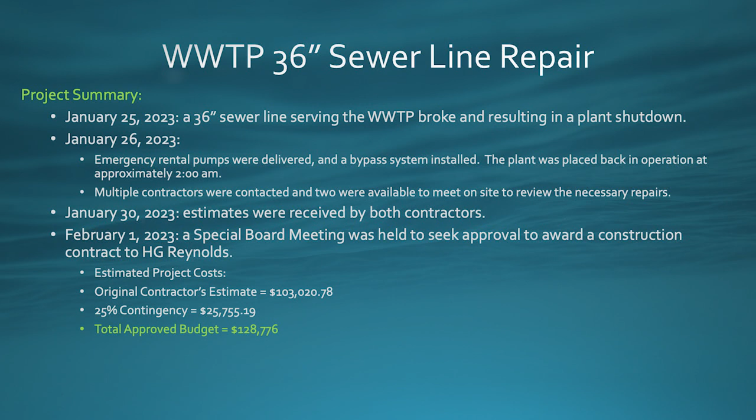So project summary, I'm not gonna run through all of these, but these are the dates of when the break occurred, when we first came to the board and had funding approved. The budget originally approved was $128,776, and then we amended that tonight. We'll go to the next slide, please. We've almost spent that 25% contingency.

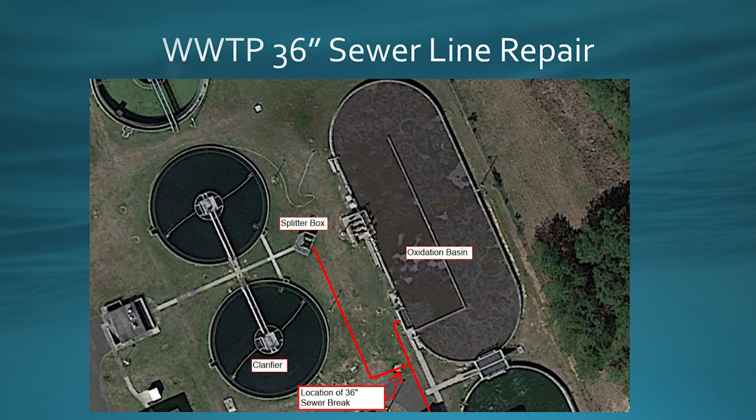Yeah, we did. So this is a picture I shared at the last meeting. This just shows the location of the break between the oxidation basin and the splitter box. And you can see that arrow pointing at the bottom. That concrete you see there was the wall of the manhole that housed the pipe where the break occurred. We'll go to the next slide.

So I've got listed here the same conflicts that I went over before during the legislative memo presentation. I won't really touch on those again, but I will show you some pictures coming up. Schedule: we anticipate March 17th, Friday this week, the 36-inch pipe will be installed and operational.

Same day, March 17th, the bypass pump system will be able to go offline after many weeks of running the plant. And then we anticipate by the next Friday, March 24th, the project will be complete. That will include all backfill, cleanup, and contractor demobilization. So now we'll run through some pictures from the site.

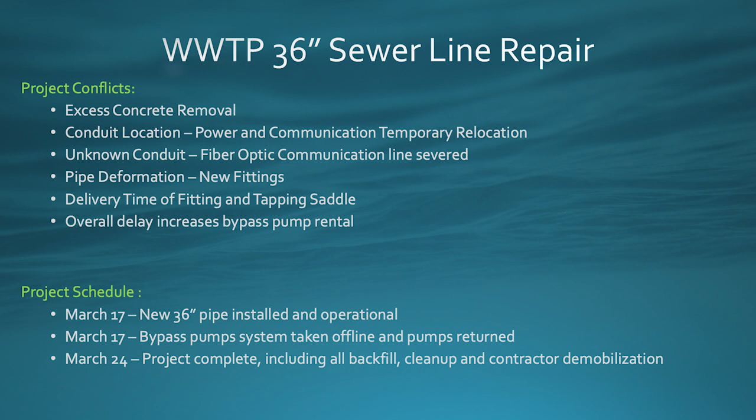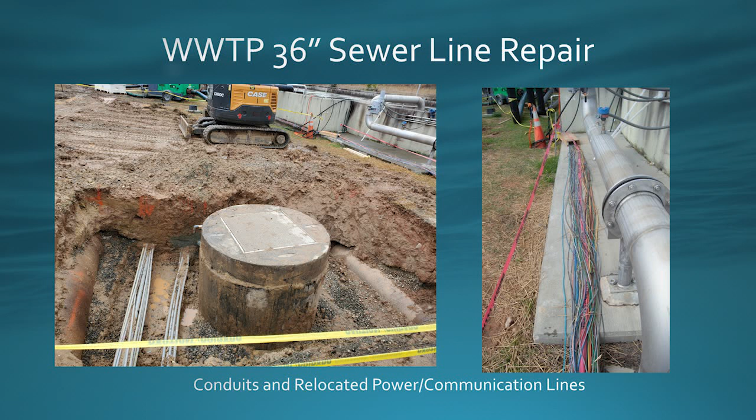So that system, those pumps have been running for about a month now. Next slide, please. So this picture shows one of the conflicts that I mentioned. Picture on the left, you can see a whole pile of conduits. Those are the 11 conduits that we found that were housing the power and communication lines. And on the right, you can see all of the different colored lines that were pulled from those conduits and moved out of the way temporarily so we could do construction.

So part of what was approved tonight was the contractor, the electrical contractor, coming back, reinstalling conduits that you see there on the left, and then taking the temporarily relocated lines and pulling them back through all of those conduits.

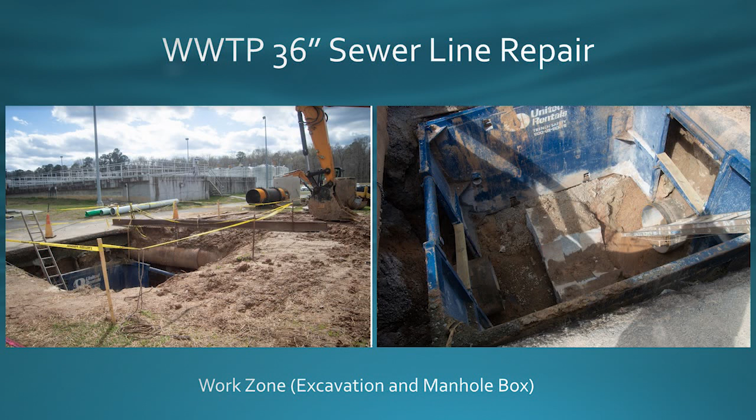Next slide. So this is a picture of the work zone. On the left, you can see at ground level the size of the excavation that was required here. The picture on the right shows, I believe it's about a 10 to 12 foot deep hole that had to be excavated. We've got a manhole box there shoring the sides to keep the ground from caving in. Obviously, that's a safety concern. We have to install that. Down in the bottom of that, you can see a small piece of the concrete cradle that was housing the pipe. We'll go to the next slide.

So these are some pictures of some of the concrete removal. On the left, you can just see some of the upper portions of the manhole. So this is a 12-foot deep manhole. That top section was about 4 feet. And then you can see there's concrete up around that already. So that shallow in the ground, we thought concrete was going to be 10 feet deep. We hit concrete 4 feet deep.

So then on the far right, you can see what looks like rocks. That's a lot of the concrete that we were jackhammering to get out of the hole. And then another picture in the middle showing some of the concrete cradle that still remained after we chipped most of the rest out. So just trying to give you an idea of just how much concrete had to come out of that hole.

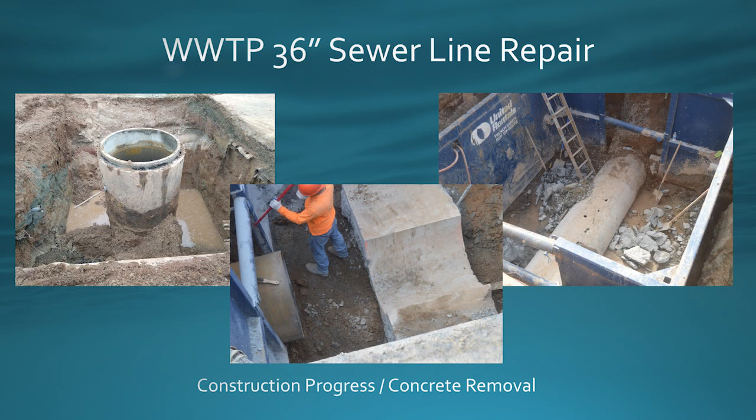We were hoping the original doghouse manhole section was going to fit and would be okay to use. But when we had all that concrete, we had to jackhammer so much that piece was destroyed, so we had to order a new doghouse manhole section.

Next slide. So these pictures show as we were trying to install the Megalugs and sleeves to get this pipe lowered into the section. So that 20-foot stick of pipe that was ordered, we had to cut it down to, I believe it was about a 12-foot section. We cut a 12-foot piece out that was broken. We had to trim the new piece down to 12 feet to fit that gap. And we were installing the sleeves here to try to lower it down and get it connected. And then that's when we found, obviously, it didn't fit.

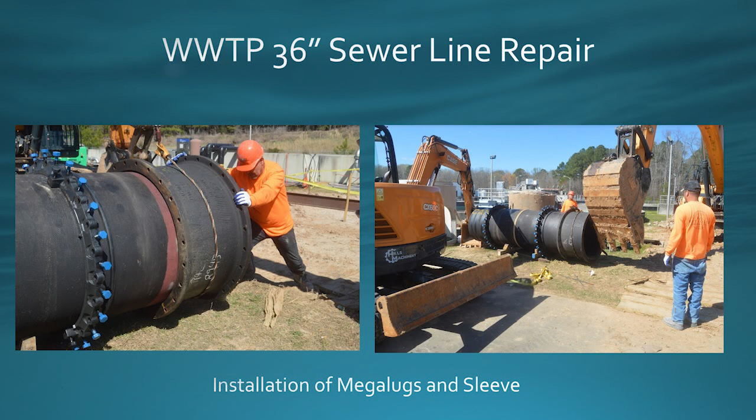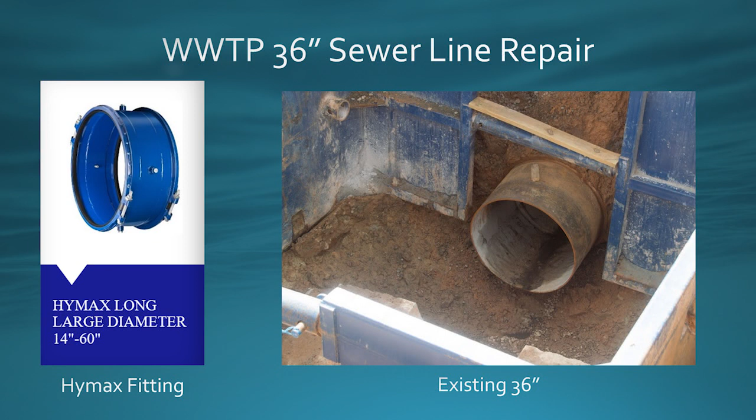On the right shows the existing pipe that's in the ground. You can't really tell how out of round it is in this picture, but that is where that piece of pipe was, I don't want to say crushed, but just squeezed down and made a little off center. So this is the pipe that we pulled out of the ground.

So the square in the middle, we did that. We cut that so we could get a pump in that pipe during work, so we could pump all the wastewater out of that. So we could empty that out, so when we cut the pipe to remove it, we would not make a mess, so we wanted to get that cleaned out.

The other holes, two of those are what we saw the night of the break. But once we got it cleaned out and pulled out of the ground, we saw there were more holes, and you can see they're all in a line there. I do want to send this off to a company to have them do some analysis to try to help us determine what caused this break.

The best we can come up with now, there was a concrete cradle that ran up close to where that line of holes is located. We think that some of the wastewater and alum mixture, alum is the chemical that we feed here. Alum by itself is not corrosive, but the best we can come up with now is some of that alum and wastewater mixture came out of that direct tap for the alum feed line and settled along that concrete cradle, basically in line with these holes that you see here. When alum mixes with groundwater, it does become corrosive.

So the best I can come up with right now is that somehow groundwater or rainwater made its way in the vault, mixed with the alum and sat on this location on the edge of this pipe, and it caused this failure. I don't have a good picture of it here, but if you zoom in, you can tell the pipe was eaten from the outside. It's not something from the inside. It's really hard to see that, and I can probably send you some better pictures. But that's the best we can come up with right now as the source of the failure of this pipe.

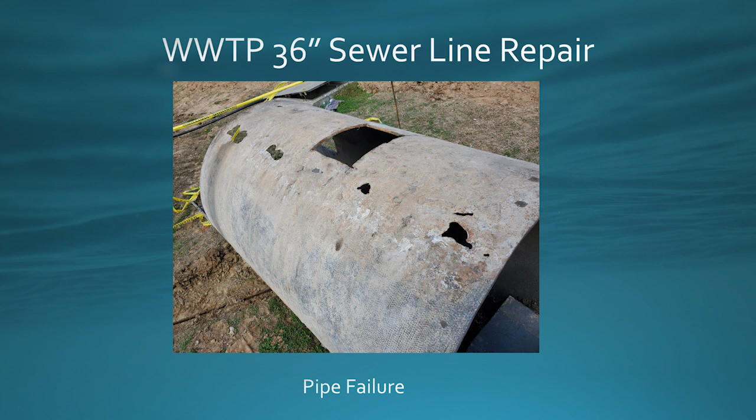But it's just odd that it's a line of 4 holes that go right along where that concrete cradle was. And was that at the bottom, or was that at the top? So the way it's sitting right now is basically how it's sitting in the hole. So that square was sitting right at the top. So we cut a hole in the top and dropped the pump into this pipe. So they were about at the 10 o'clock position on the pipe.

Next slide. So on the left here is the tapping saddle that is being installed around the pipe. This allows for a better, more secure connection point when we make the tap and install the alum chemical feed line, and that is shown on the right. That is some of the system that's going to tie back into that pipe to deliver the chemical. We put alum into the wastewater, and that helps it to settle out in the clarifiers, which is the next step in the process.

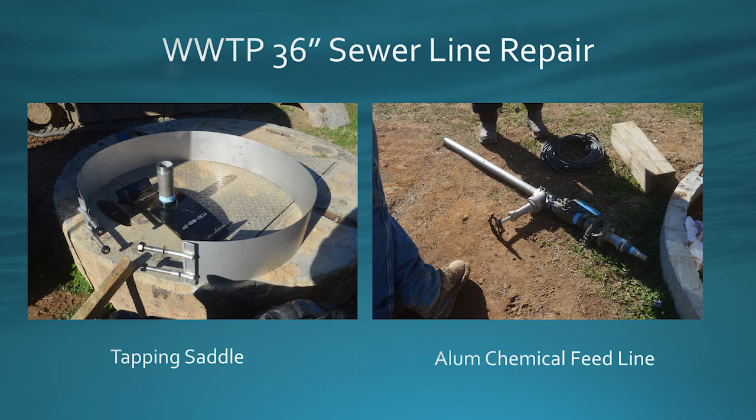So I've got more pictures that I can share if anyone wants to see, but I wanted to share these just to give you an idea of what we're dealing with, some of the problems we've faced, and the solution going forward. So hopefully within, like I said, 7 to 10 days, we're done. So are there any questions about this project? Having the pictures was helpful. Very much so. Yes, thank you for the pictures.

All right. Next up, I'll give a brief update for the I-85 sewer project. Everybody here knows the scope, so I'm not going through that again, but over the past 30 days, CDM Smith and SGWASA performed site visits to evaluate lift station layouts, gravity sewer and force main alignments. We're really working hard on the 30% design of those. So we're really nailing down what we need for the routes and easements and so forth. CDM Smith completed the USDA environmental assessment, and they submitted that to SGWASA for review.

We're still making progress to try to finish up the traditional surveying and underground utility marking. We prepared documentation for property owner notification for geotechnical testing for the lift station sites. SGWASA, CDM, and our attorney met with the Department of Health and Human Services to discuss sewer improvements through their property and the easement acquisition process. We do have a portion of the northern interceptor line that will be going through state-owned property around Murdoch.

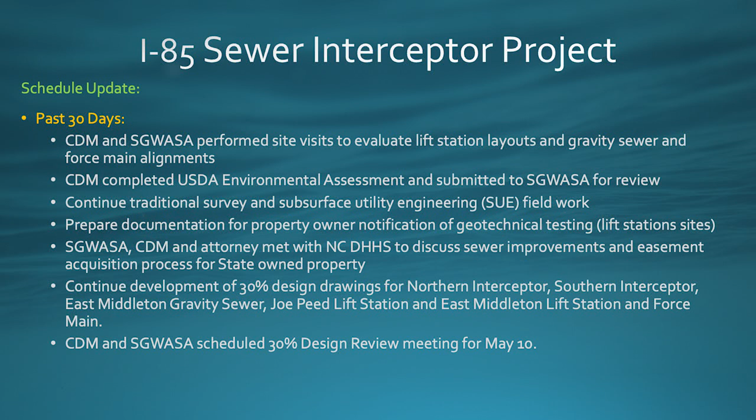Over the next 30 days, CDM is going to update the USDA PER. SGWASA staff reviewed that document over the past few weeks and got comments back to them. They're making revisions based on that. And we plan to submit the USDA funding application within the next 30 days. That's a big milestone. Go back one with the title.

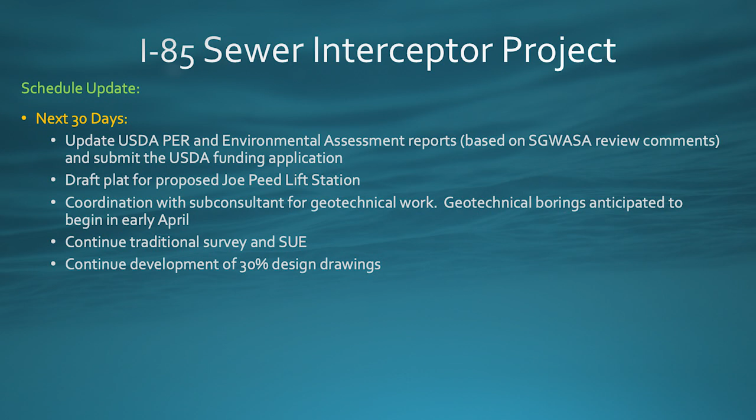So we work on a draft plat for the Joe Peed lift station. We're coordinating with the sub-consultant to start geotechnical work over the next 30 days, and we believe that will start early April. Hopefully get closer to finishing up the traditional surveying and utility marking and continue working on those design drawings. So that's a quick update for the I-85 project. No schedule changes on that yet. No delays, no dates pushed back. So with that, I'll take any questions on that project.

Any questions? Mark, I'm sorry. Go ahead. Just a comment after the board members have any questions. Yeah. Go back to the previous slide. So Mark, just for the board, the first bullet item as far as the USDA PER and submitting that. So we're basically on time. Didn't we anticipate about March, April to get that submitted? Yes. Okay, so I think that's important for the board to understand here that last fall, we asked the board's permission to move forward with the application process and developing the PER.

I found the PER to be very interesting, quite honestly. It's a lengthy document, but Mark often refers to the number of permits that we have to obtain for this project, and they're all listed throughout several pages. It's quite interesting, but I want to impress upon the board that we're still on time with this project as far as the project schedule, especially in developing the 30% design drawings, those type of things. So we anticipate that we would have our application submitted in the next 30 days.

And we believe that we may have an answer back from the USDA come August. Before September. Their fiscal year is October 1st. So we're trying to get everything wrapped up so that we're, I guess you would say, first in line at the beginning of their fiscal year, which is very advantageous to us. And recall that when we get our application information back, we will share that with the board, what that means, what the terms are, those type of things, and have another meeting to present to the board. So that'll be coming up later this summer. So just wanted to mention that as well. Thank you, Mr. Chair. Thank you, Mark. Okay.